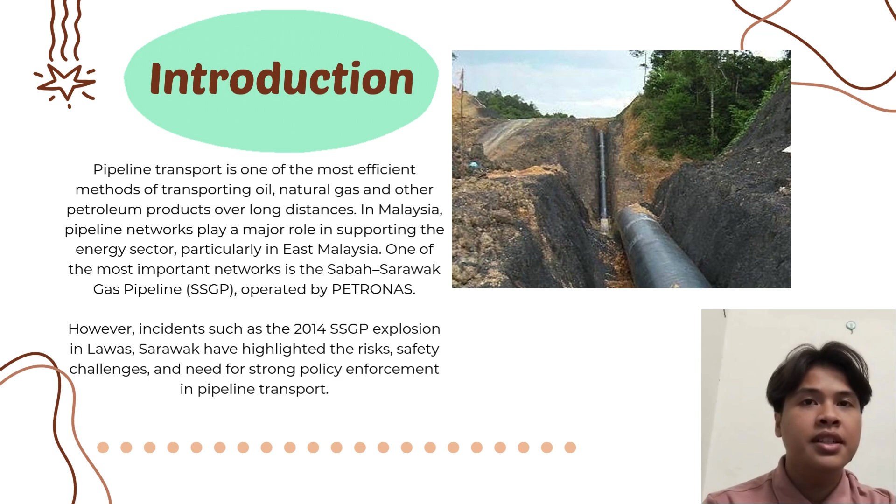You can see a pipeline photo in here.

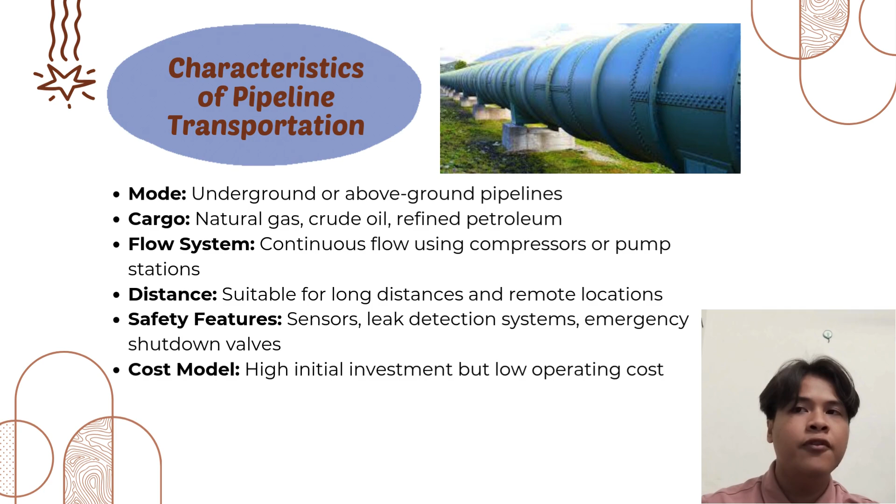For the characteristics of pipeline transportation: first, mode - underground or above ground pipeline. Second, cargo - natural gas, crude oil, refined petroleum. Third, flow system - continuous flow using compressor or pump stations. Fourth, distance - suitable for long distance and remote locations. For safety features - sensors, leak detection system, emergency shutdown valves. And for the cost model, high initial investment but low operating cost.

Now I will talk about advantages and disadvantages of pipeline transportation. For the advantages: low operational cost after installation, safe and stable flow of gas or product, not affected by traffic or weather, environmentally cleaner compared to trucks or ships, high capacity for transporting gas or oil.

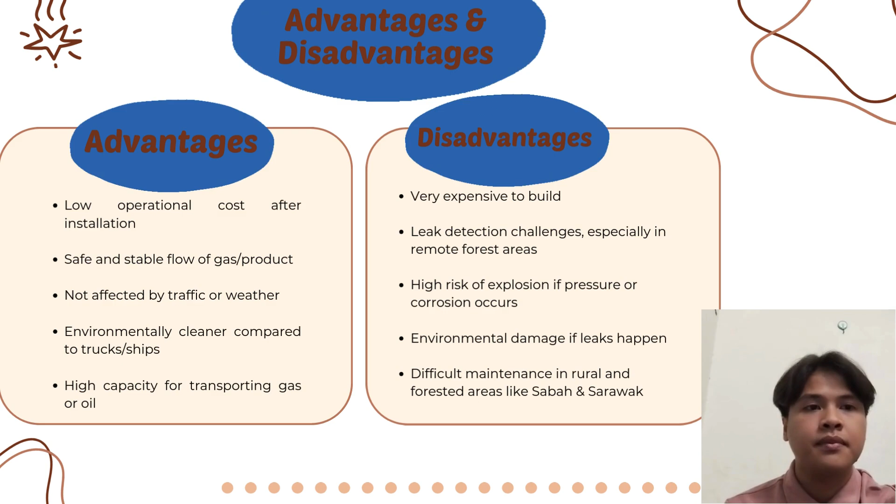For the disadvantages: very expensive to build, leak detection challenges especially in remote forest areas, high risk of explosion if pressure or corrosion occurs, environmental damage if leak happens, and difficult maintenance in rural and forested areas like Sabah. Now I will explain about infrastructure and network.

Major pipeline networks in Malaysia: Sabah Sarawak Gas Pipeline SSGP, 512 km from Kimanis, Sabah to Bintulu, Sarawak. Peninsular Gas Utilisation PGU, West Malaysia's largest gas distribution network. Kimanis Kota Kinabalu Pipeline. For the policy: Petroleum Development Act 1974 PDA, Petronas Control Ownership and Regulation.

Second, Environmental Quality Act 1974, Pollution Prevention. Third, OSHA 1994, Workplace and Operational Safety. For the last, Factory and Machinery Act 1967, Safety of Mechanical System.

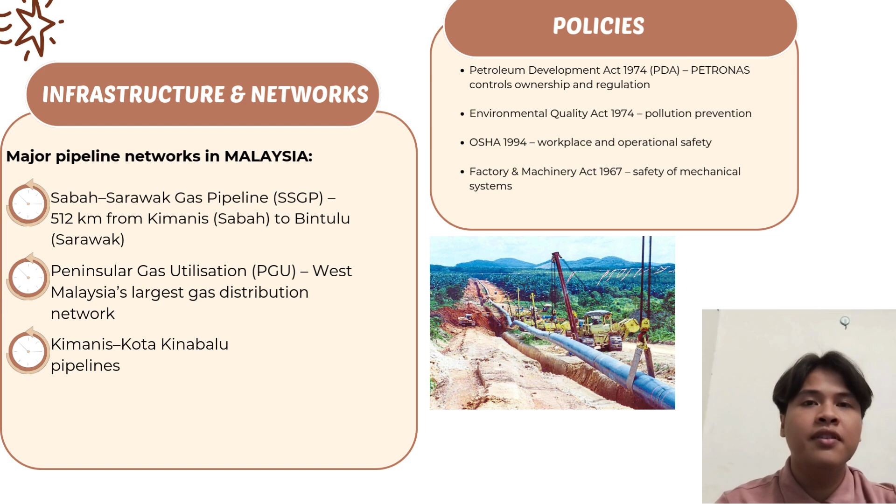They have one example of pipeline. Issue and challenges in pipeline transportation.

First, corrosion and wear and tear in tropical climate. Second, landslide and soil movement in hilly Sabah and Sarawak. Third, sabotage or vandalism in remote areas. Fourth, delay in maintenance response due to distance. Fifth, aging pipeline with pressure irregularities. Sixth, coverage in dense forest. Seventh, high pressure build up that can cause explosion.

For the stakeholders: government - DOSH Department of Occupational Safety and Health, DOE Environmental Agency, Ministry of Energy. For the operator, Petronas Gas Berhad. For local communities, villages in Lawas area, environmental groups, forest and wildlife NGOs, and for the consumers, LNG industry power plants.

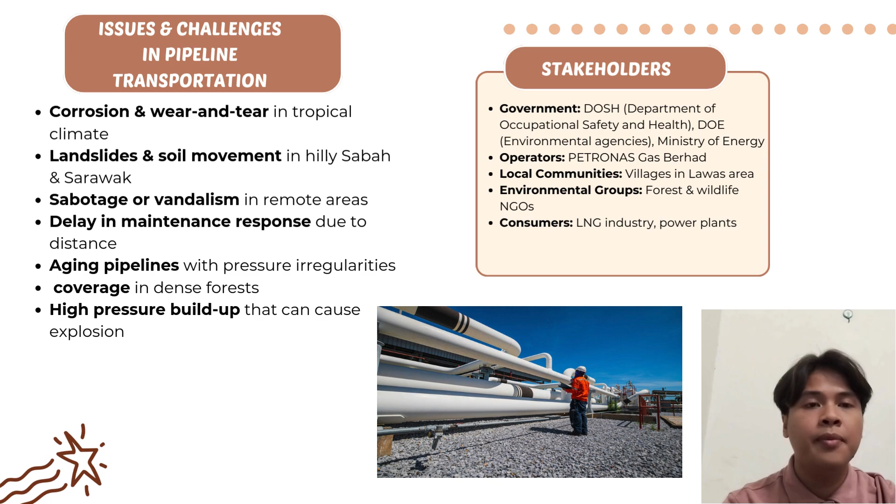For my case study, I will talk about the Sabah Sarawak gas pipeline explosion in 2014. This case happened on 11 June 2014. The location was Lawas, Sarawak. The pipeline is called Sabah Sarawak Gas Pipeline (SSGP), and the operator is Petronas Gas Berhad.

For the incident summary, a gas leak caused a major explosion and fire along a remote section of the pipeline. The accident forced nearby villages to evacuate and resulted in temporary disruption of gas supply to Bintulu LNG. Causes of the explosion were pipeline pressure irregularity, possible soil movement due to heavy rain, structural failure at the affected section, and weakness in pipeline integrity monitoring in remote regions.

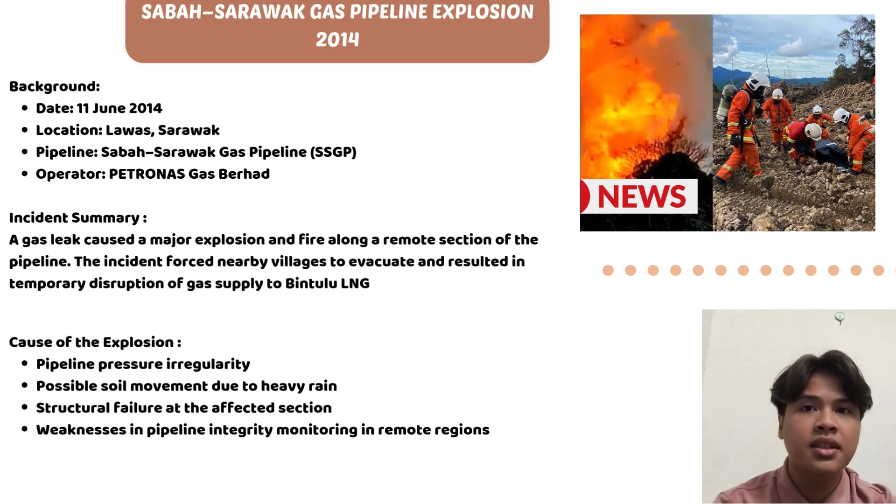For the impacts, human and community impacts: residents forced to flee for safety, fear and loss of trust in pipeline safety, loss of crops and damage to nearby forest land. For the environmental impact: fire damage to surrounding forest area, emission of gas into the atmosphere, potential soil contamination.

For the economic impact: temporary halt in gas delivery to LNG facilities, repair costs and investigation costs for Petronas, disruption to downstream industry. For the operational impact: shutdown of pipeline, emergency response activation, full investigation into pipeline integrity.

For stakeholder interaction: Petronas activated emergency shutdown, DOSH and DOE conducted safety inspections, local government assisted in evacuation, community leaders coordinated communication, environmental groups monitored damage. This interaction affected both the efficiency and safety of pipeline operation. Good coordination helped reduce casualties, but the accident highlighted the gap in monitoring remote pipelines.

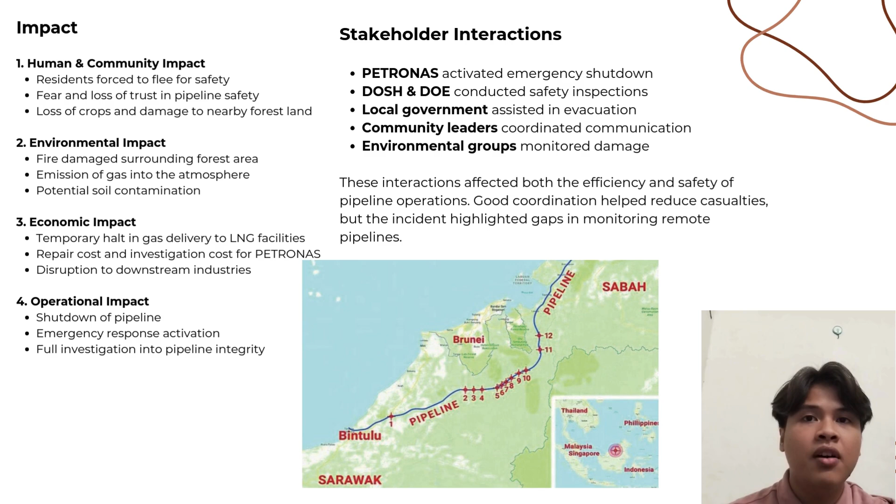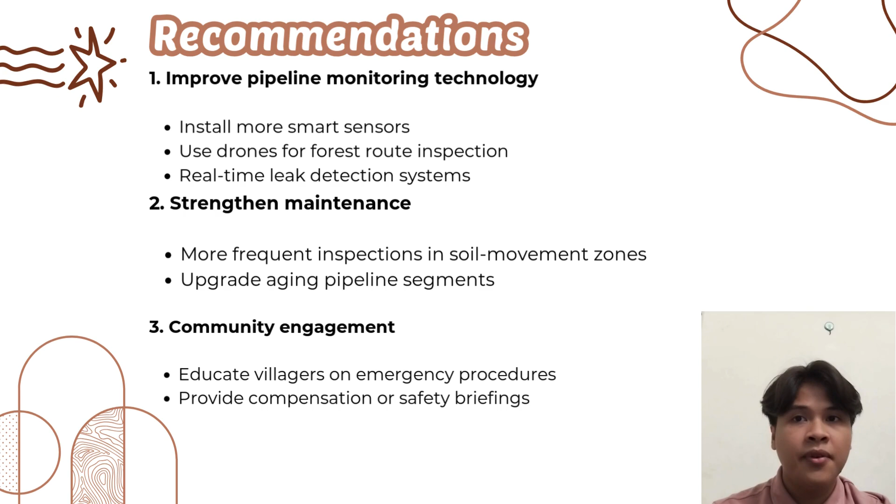For my recommendations: first, improve pipeline monitoring technology, install more smart sensors, use drones for forest route inspection, and real-time leak detection systems. Second, strengthen maintenance - more frequent inspection in soil movement zones, upgrade aging pipeline segments. Third, community engagement - educate villagers on emergency procedures, provide compensation or safety briefings.

For my conclusion, pipeline transportation is vital to Malaysia's energy security, especially in Sabah and Sarawak. However, incidents like the 2014 SSGP explosion show that pipeline systems require strong monitoring, safety policies and cooperation from all stakeholders to prevent disaster. A well-maintained pipeline combined with active policy, technology and community engagement can significantly improve the efficiency,

safety and sustainability of this transportation mode. Thank you.